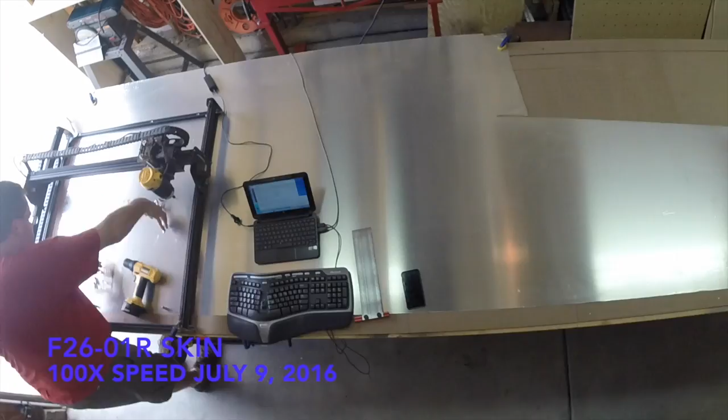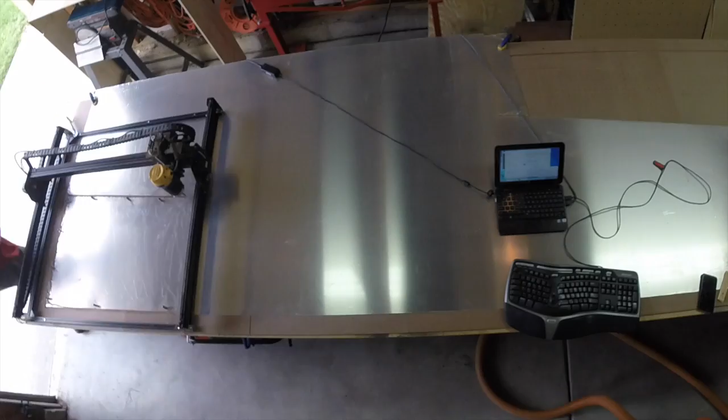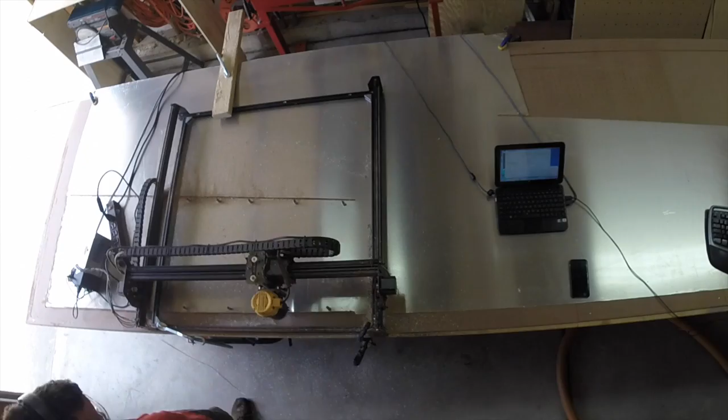What we're looking at is a 100x speed-up of the routing and drilling of this large skin I'm doing for my aircraft. I've taken the baseboard off the CNC and just used the framework, then I clamp it down on top of the material and am able to do a portion of the skin at a time.

In this presentation, over the next 10 minutes or so, I'm going to go over the steps I use to get the CNC set up to do these pieces, and how I got accuracy moving from one piece to the next so that this becomes one large piece.

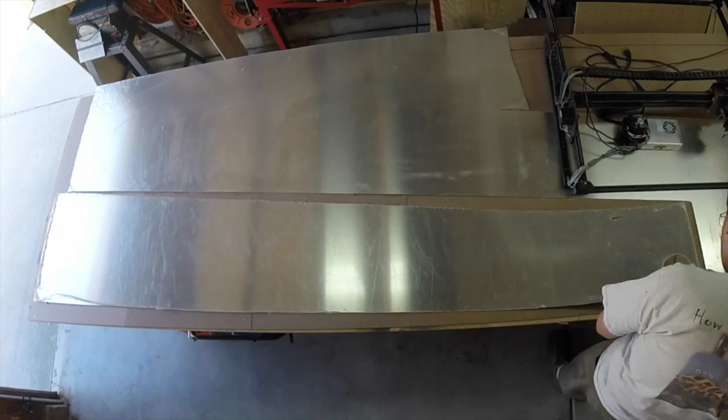Now that you've seen the end product we're trying to tile across, let's figure out how we're going to set that up in Autodesk Fusion.

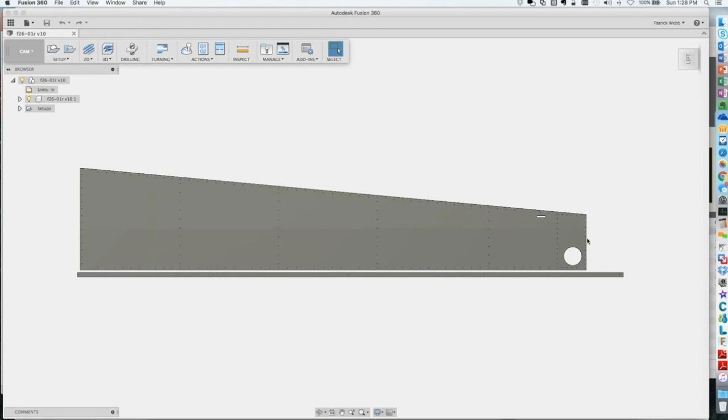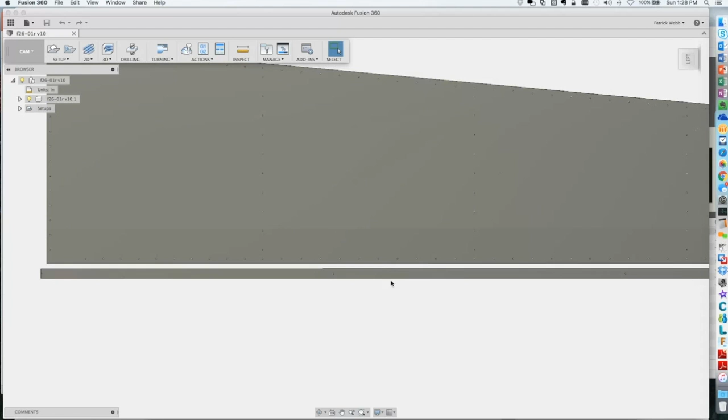We're in Fusion here, looking at the skin that you just saw being CNC'd and cut. You also see this little strip on the bottom that I made just to make it easier to see. Basically, this strip I've drawn in is a small 1-inch strip with a hole marked every 30 inches.

I'm going to use that as my reference, my 0,0 reference point. I'll describe that more in the slides, but you have a 0-inch, 30-inch, 90-inch, 120-inch mark — each of those is going to be my 0,0 XY reference point when I do the CNC routing and drilling.

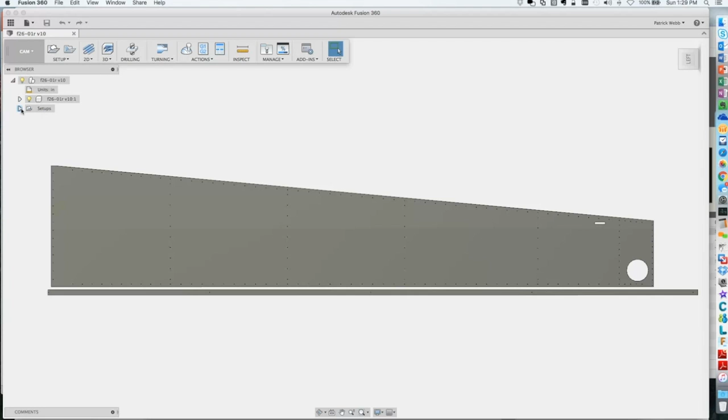The part is drawn out the same way we did with other small parts, this is full scale. Then when we go into CAM, we're actually going to have multiple setups. I'll start with setup 1, minimizing some of the others so you can see. When you turn on setup 1, remember in the CAM portion from the other video, you set up how big your workpiece is.

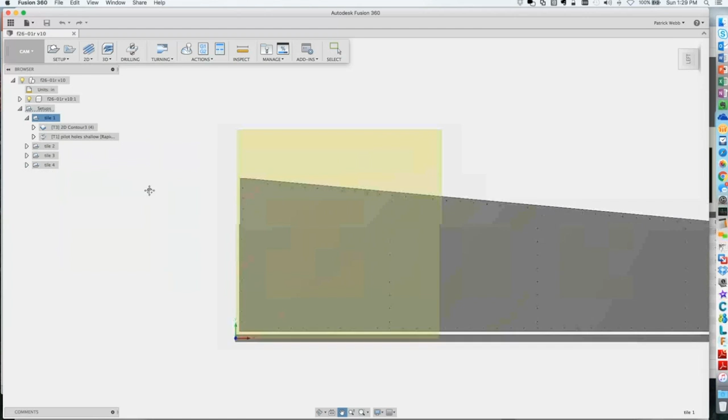So what I'm going to do is just pretend like my workpiece is 30 inches by 30 inches. You can see the corners center on these reference holes, the 0,0 and the 0,30 reference hole. This is going to basically show where the material is going to get cut out. So I've set that workspace up.

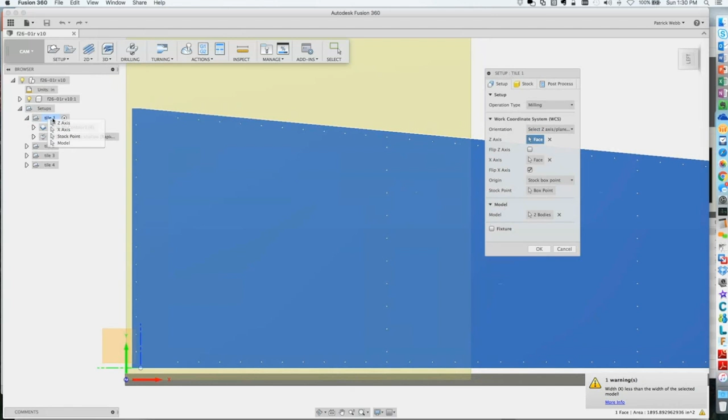If you right click this — there we go, if I double click it — stock. Here you can see a 30-inch width. I've set it to a 30-inch by 30-inch width, and my height is still the same, so the material thickness stays the same.

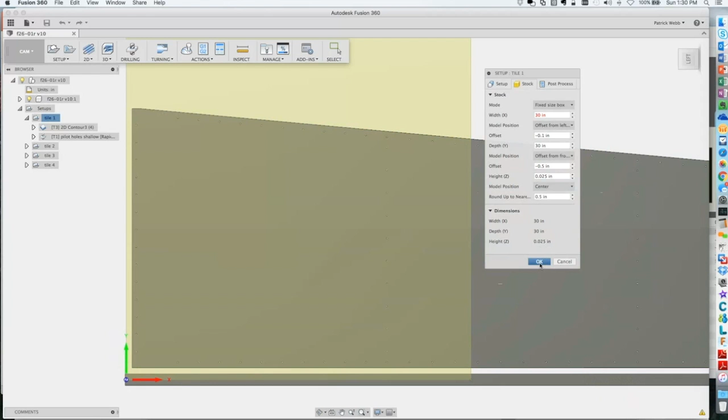But that's the real trick here: setting up the workspace to be the space you're going to cover in that one CNC motion before you move the whole CNC machine.

And then, of course, I set up standard contour paths — these are cut path, 2D contour path, and the pilot hole path. When you select those contours, it knows it's only going to do the part that's within that workspace.

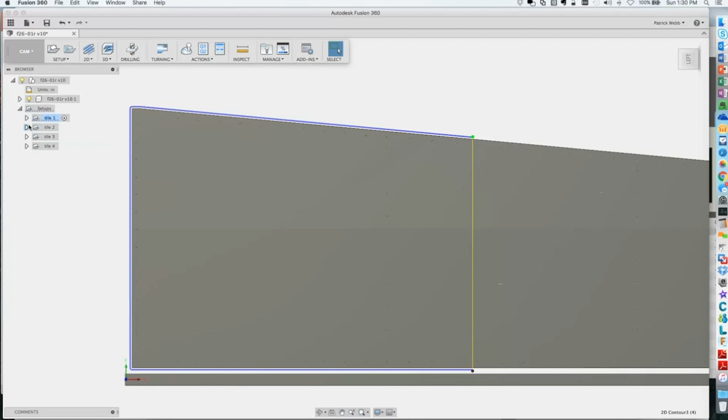So you can see that's our first tiling section. Then we go to the second tiling section, zoom out a little bit, and then we'll see our next thing.

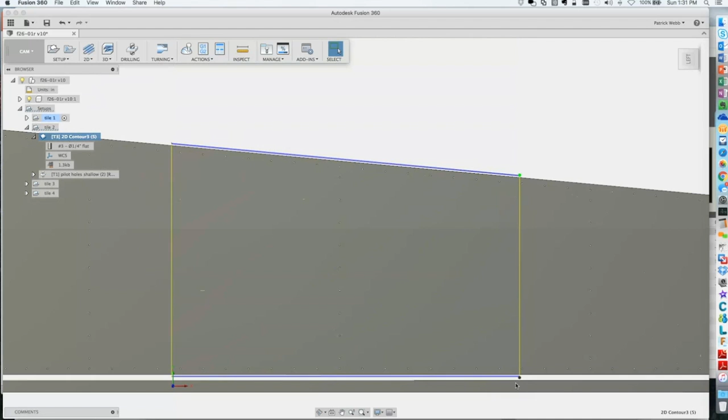Here's our next contour pass. When we're in the second tile, we click on that, and you can see it's going to do a cut here, and then a cut on the bottom. In this case, I did 2 cuts, but I didn't really need to. I did a cut and came in a little closer, and then of course the pilot holes. Now we zoom back out here.

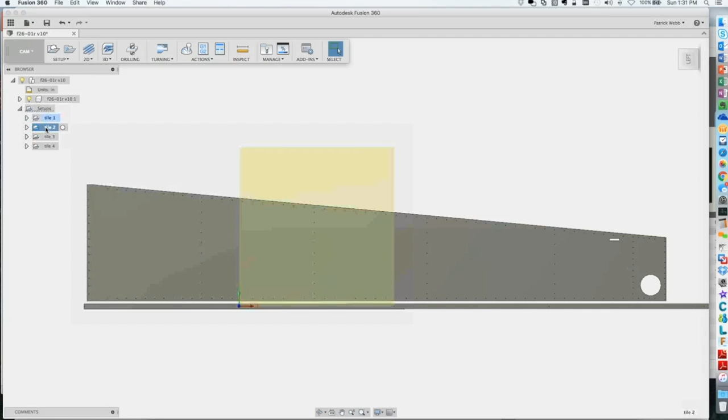To do this whole part, we're able to click through the tiles. So here's the first tile, second tile, third tile, fourth tile, and I have basically G-code files for both the routing pass and the drilling pass.

So that's pretty much it, pretty straightforward. Let's go back to PowerPoint here for a second.

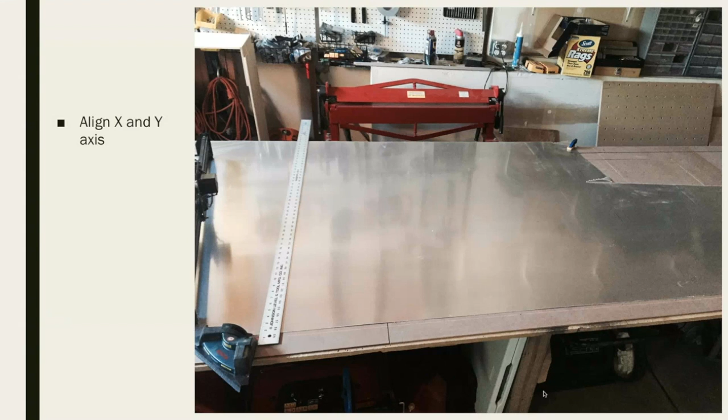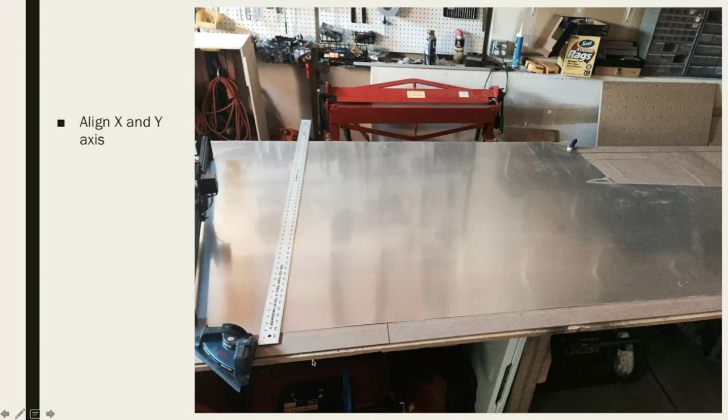Some other tips that are important besides how to do the CAM part. I've got this big piece of metal on my workbench, and you need to make sure that X and Y are perpendicular. In my case, the X-axis is along the horizontal here, the Y-axis is going into the workbench, and Z, of course, is going up.

What I found useful is to take a square laser, this device over here, that shoots out 2 lasers perpendicular to each other. That's going to allow me, when I put some marker spots, to keep my horizontal and vertical square with each other. So I'm going to put a marker spot up here to square my CNC, because the CNC is now a little flexible.

I don't have a baseboard on it, so I can move it—it has a little bit of flex. The trick here is this X-axis has got to stay straight over 10 feet, so the laser really helps with that, as opposed to a tape measure or a long straight ruler. With the laser, I can get real precise on putting a mark.

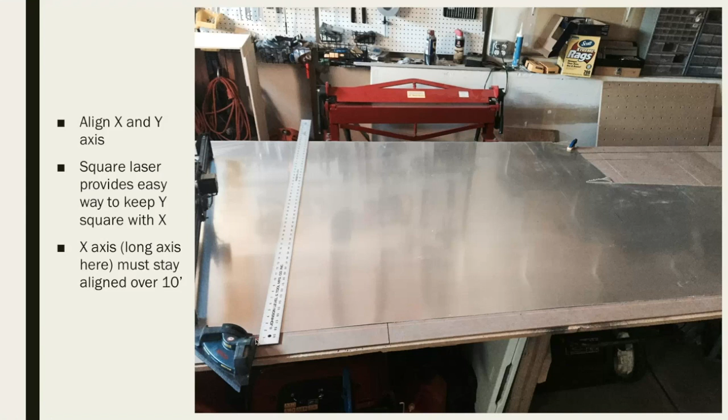Here's the laser line. You can see, using a fine point Sharpie, I've marked off. This line is a little thicker, but I knew that right here in the center is where my reference point is.

So I set the laser at 0,0 for the entire piece, and then I mark 0,0, then 30 inches over, 60 inches over, 90 inches over, 120 inches over along the X-axis. So I've got all my markers.

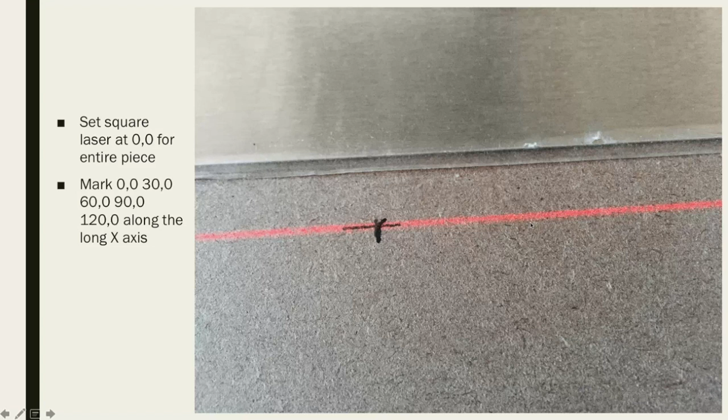And then on the Y-axis, I move the square laser to each of those 30-inch reference points to put a reference out for my Y-axis, so I can clamp down my CNC properly.

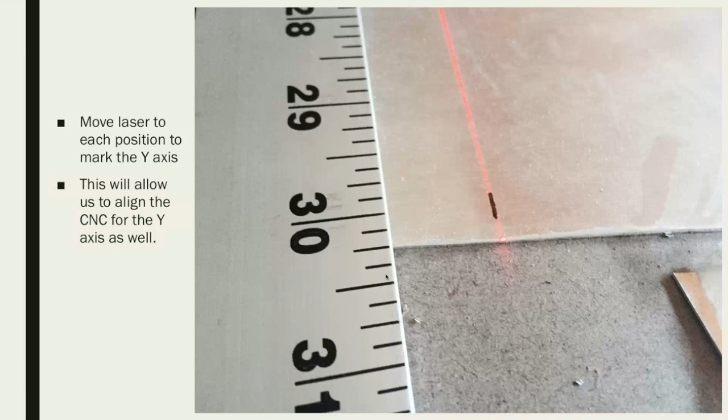Here's a better picture of that. Basically, you need 3 points for each CNC alignment: your 0,0 here, your 30,0 — so 30 inches on X, 0 on Y — and then your 0X, 30Y out here, so that I can make sure that when I move the router, it's going to be square.

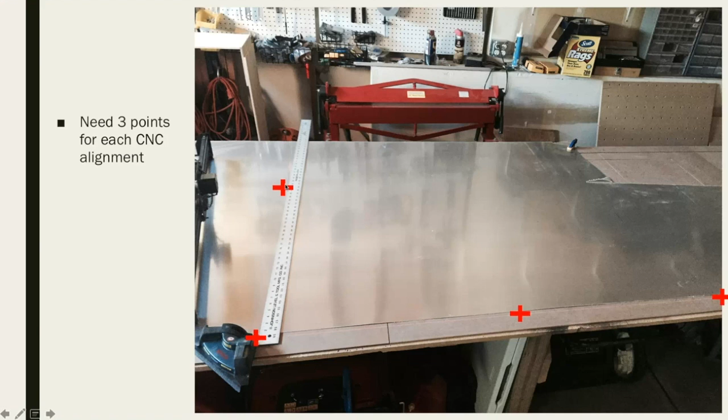So here's 0,0, here's 30,0, here's 60,0. There's your 30-inch mark over there that I want to mark. So I just make a line up there so that when I move the drill, you see all the reference points here.

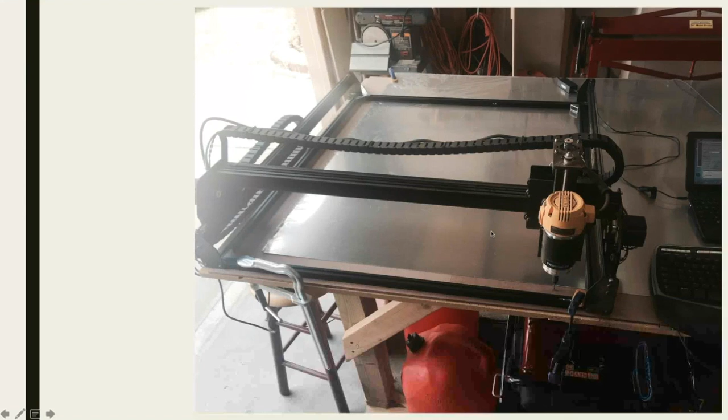When I put the CNC down, then I'm going to move — I've got the drill bit in there — I'm going to move it to 0,0 on my universal G-code sender, and then try to get it lined up and then clamp down. This big metal here is a clamp.

Clamping it down to secure it to the table. Of course, my material is clamped down too. So I'm going to clamp it down just a little bit.

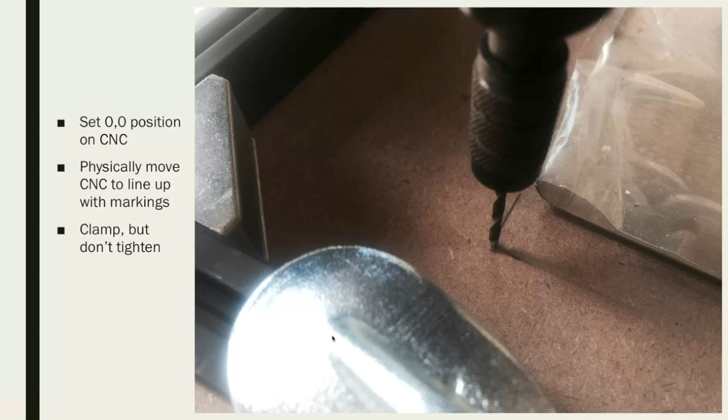So what we just saw with the 0,0 over here, then I move on my Universal G-Code Sender, I manually jog the router over 30 inches, right? I jog it to the, it's actually the 30,0 position. And then I clamp here.

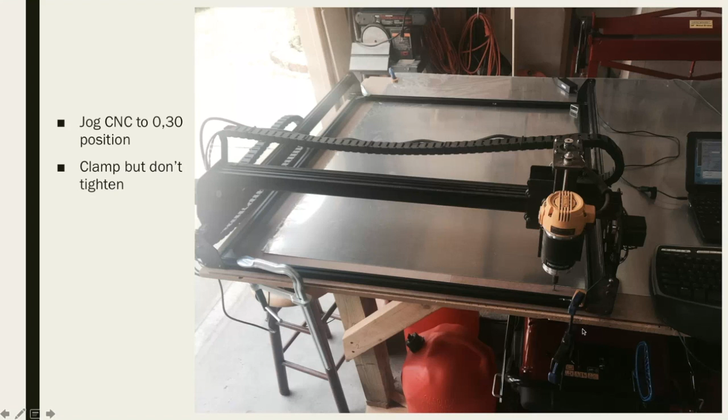I've got another clamp right here. So I'm clamping the CNC. You see the black metal. I'm clamping those two down so that that stays aligned in that axis.

Right over that point, I jog back to 0,0. As you move this around, you have to kind of tweak it a little bit to get it so that it stays, when you move from 0,0 to 30,0, that it does line up both times. And then I tighten down.

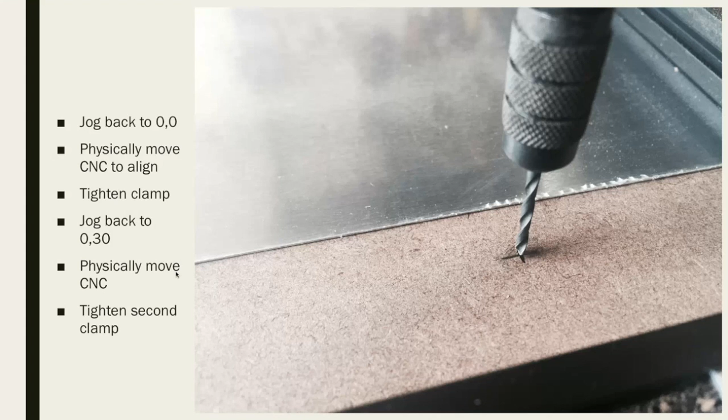Then what I've done here is I've moved out to the 30-inch position in the Y-axis. And this black, this Y-axis beam, it can flex now that I don't have a baseboard holding it in place. So I'll move it out here and get this length, and then I'll clamp down the Y-axis.

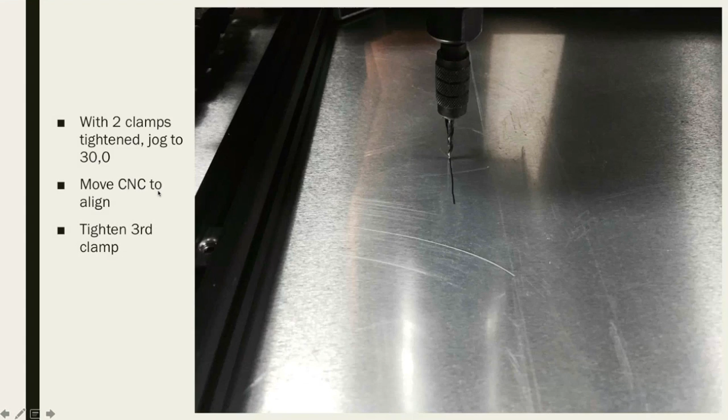That's a third. In this picture, you can see a little better. Actually, the clamp's not on there. You'll see it in another picture. I've got clamp here, and then when I was out here, I would use another clamp on this axis, and you'll see it in some of the other pictures. I use like a 2x4 to hold it down and clamp at the edge of the board because this is a 4-foot table.

The other thing you've got to do is measure to ensure that the distance traveled is accurate across long distances. I had trouble with this at first with this router in that it's belt driven, and it's not a real scientific process to tightening the belt. So if you tighten the belt too much, which I initially had done, it had gone more than 30 inches.

The other thing I learned about was that you can actually set, using the Universal G-Code Sender, how many steps the stepper motor takes to travel certain distances. I'll try to put some notes on my website about that, but I recently learned about that, and I think that's a way to really calibrate down so that once you've got your belts tight, you're moving that actual distance.

So out of the box, it wasn't quite precise. I would get, in one axis, I think I got about a 1/16 of an inch—it would travel an extra 1/16 of an inch over that entire distance. And the other axis, I think it was almost 1/8 of an inch that it would travel extra over the distance, so too far, right? And you really want the precision.

So in the video that you saw, I got by that by loosening the belt a little bit and still getting what I needed. But the next skin I do, I'm going to go and tighten the belts up to kind of the proper tightness, and then I'm going to calibrate it by adjusting manually in G-Code Sender what the step value is to move certain distances.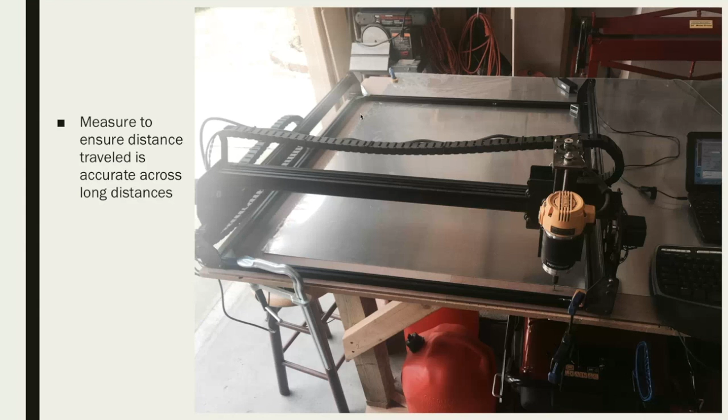And that's it, and so thank you again. If you didn't watch the first video and you're interested in some of the basics, this was more of an advanced session on tiling, but I go through step by step on how to draw a part, how to do the CAM, how to do the CNC, the G-Code Sender, so you can start from scratch and make a part. So that's in the other video. It's about an hour long, but this is just focused kind of on the tiling. So thanks a lot, and I hope you enjoyed.